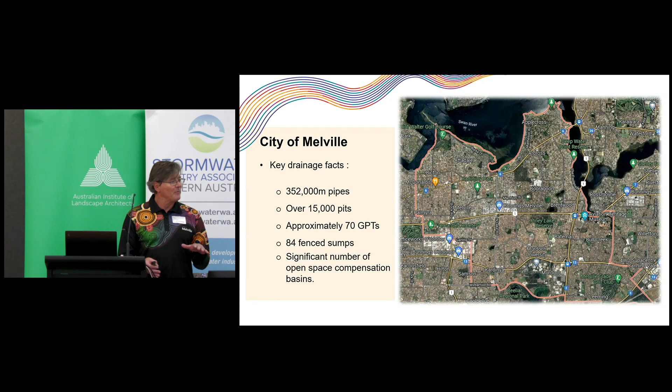Generally speaking, apart from near the wetland areas, we've got pretty sandy soils, so there is that opportunity for infiltration. Looking at where we see our major opportunities, some of that is around our asset renewal and upgrade programs.

We have different asset management plans for parks and irrigation that help us with our planning. For example, in our capital works program, we've got a total budget of around 100 million, and of that about 1.5 million is on capital renewal of our drainage infrastructure, and about 700,000 a year is on upgrade and new capital infrastructure in drainage. Our maintenance program is around $1.3 million a year. So it's not insignificant funding we've provided, and we're keen to reduce the impacts of drainage management that leads to flooding and other impacts.

So I'll cover a few things: I'll talk a bit about the living streams and the swales, a bit around our sump retrofit program, some of our gully infill work, and then look at pit and pipe maintenance, just to give you an idea of the sorts of maintenance activities being undertaken.

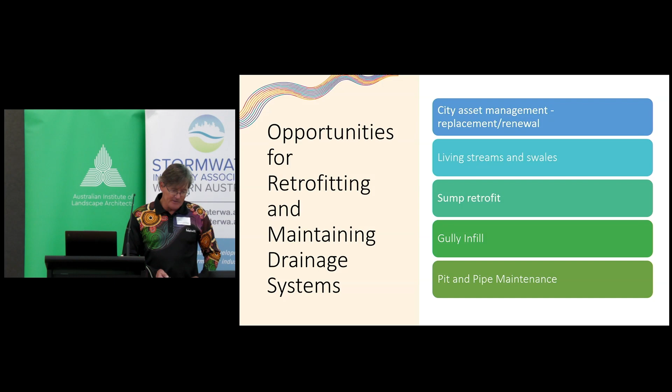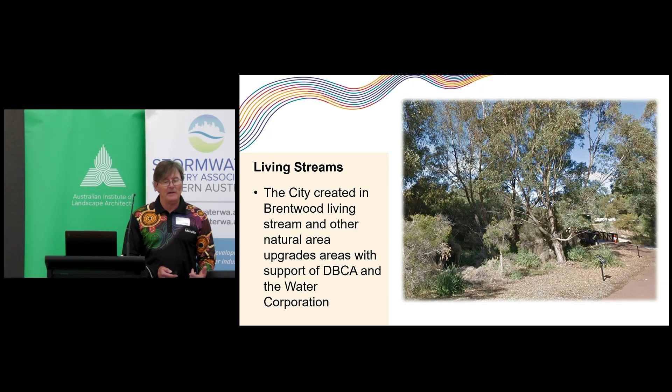So the living streams - I know lots of local governments do this - we had one particular one in Brentwood done in partnership with the local community and NRM groups in the area, and that's been really successful in terms of rewilding an open drain. We use that as a demonstration site to show other people what can be done in translating an open drain channel into a living stream. It's about habitat and wildlife, and we're definitely seeing a lot of increased biodiversity in that area.

The other thing we've been looking at is roadside swales. So instead of putting water into a side entry pit and piping it out to the river, we're letting it flow off into these swales and gradually soak through. There's a whole bunch of benefits: improving water quality going into the river, and also providing an opportunity to plant out in these areas and create shade. We've found we don't need to go to a lot of extent in terms of putting in rushes and sedges to get the water quality improvements - it seems to happen just with a fairly modest type of re-vegetation, though we have done quite significant re-veg in some areas to achieve multiple outcomes.

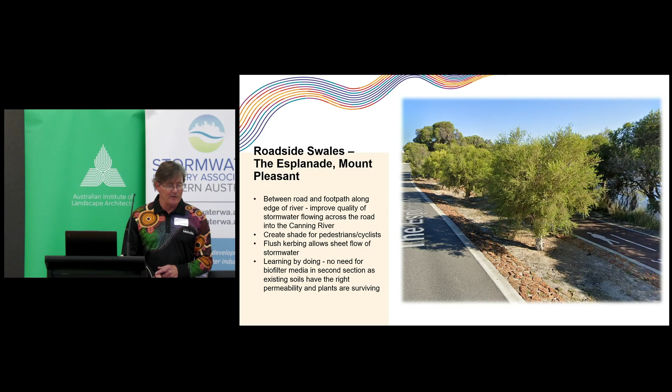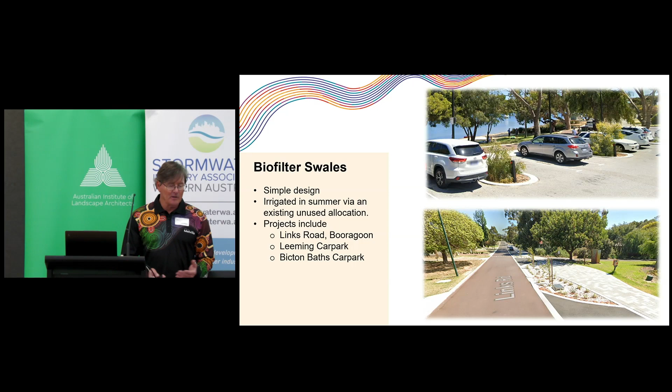This was taken about a year and a half ago, so this is all grown now and the trees are growing. It's really created quite an amazing environment which was in reality quite a harsh streetscape because you've got the large path to connect a couple of schools.

We're also just recently doing some sump retrofits. In this case, we've brought in a 140,000 litre bladder and located it adjacent to the main inflow into the compensation basin, and have taken water off that, which is then pumped into this bag and provides us with some additional storage. We're using that mainly for tree watering and for construction and maintenance watering, so dust suppression.

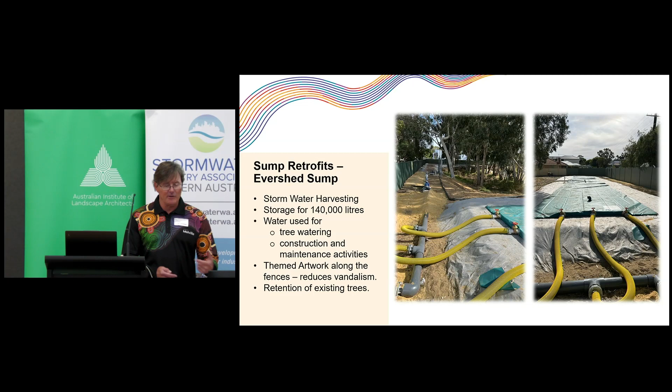Around the actual fence, we took the opportunity to upgrade that and have put in themed artwork around biodiversity, and made sure that through these works we retained all the trees in this area, which are part of a key area of our compensation basins. We've had them revegetated and try to minimise the area we have to get in and clean out and disturb.

This project's pretty exciting. This is our gully infill and renewal program. What we learnt is that we had a couple of really big storm events where we had water lower down the landscape just not being able to cope with the infrastructure there.

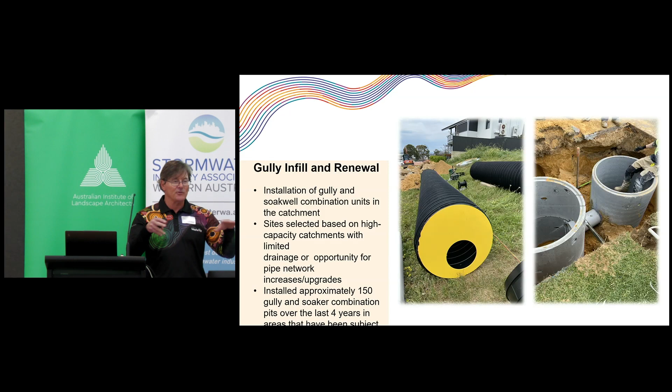So we're having stormwater lids popping up, big concrete lids like this just popping up, and a whole lot of properties flooded, and also other infrastructure damage. So we realised we have to go back up into the landscape, back up into the catchment, and start storing higher up to actually have less water going into the system.

These are designed so that as they fill up, water gets shedded off to the side to store, so that it holds it up, and then it just soaks through the ground while the main pipe still takes most of the load. We've installed about 150 of these to date, and we will keep putting these in because they've shown to be very effective, and actually quite good for maintenance as well. This has really helped reduce our flooding incidents through a couple of events we had in the last couple of years.

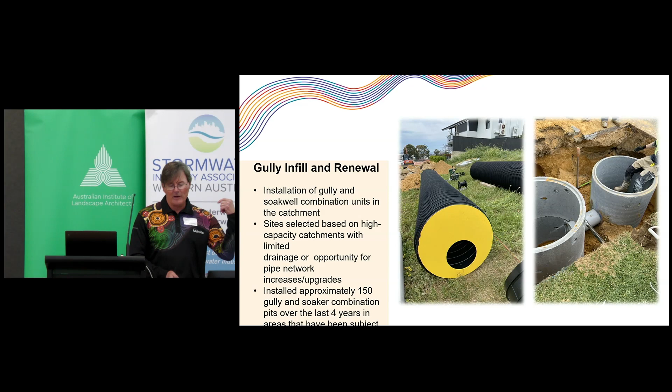Before it stopped raining - our pit and pipe maintenance, this is where we get in and make sure our pipes are operating effectively and our pits are doing what they should in terms of trapping sediments and rubbish and other organic matter. We have a tender that we put out every year for this, or on an ongoing basis. We've vacuumed and cleaned about 5,000 pits, and we've completed up to basically 12,000 metres of CCTV pipe inspections.

Sending these cameras up the pipes to see what's going on, you find big roots in there and you have to get in there and clean them out. We've jetted out about 3,000 metres of pipe, so that's where you clean them up, and then we can go back and monitor to see that they're still clear.

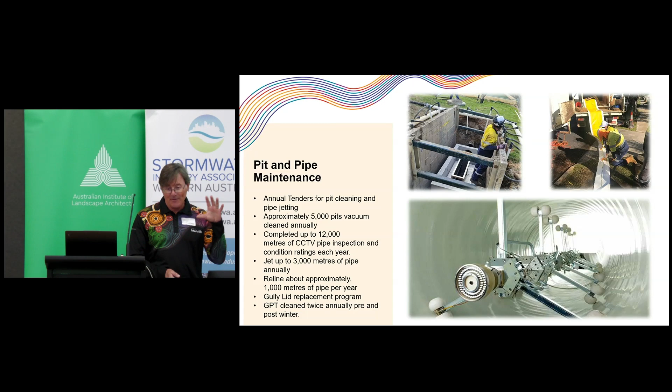We've relined about a kilometre of pipes per year in this, and that's basically sheathing the inside of the pipe with a really hard plastic liner that roots can't get through. I've surprised myself that they held up, but with all the trees around them, they still keep the roots out and operate in a circular fashion, not being pushed in by the roots as well.

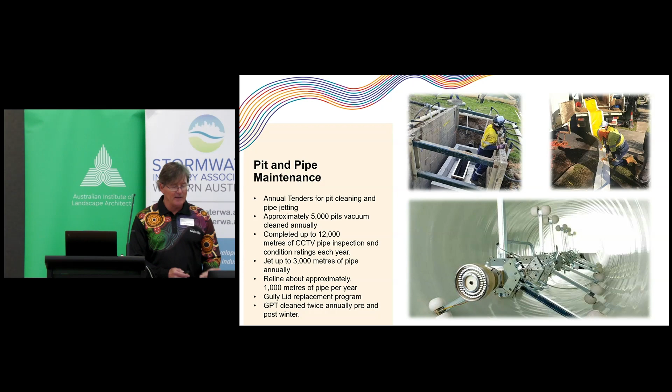We generally try and get our GPTs cleaned out twice a year, so pre-winter and post-winter, and that seems to be able to keep our water quality where we need it to be.

We've also looked at opportunities for greater infiltration at source, on the road surface basically, and we've got a number of projects looking at permeable paving, and that has shown to significantly reduce some of the work that we're doing in these areas. We've used some specialist advice around the use of the paving, and also identified areas where we think we can do it and significantly reduce the pressure on the drainage system.

So we've completed a couple of projects, a road project and a major streetscape and road project.

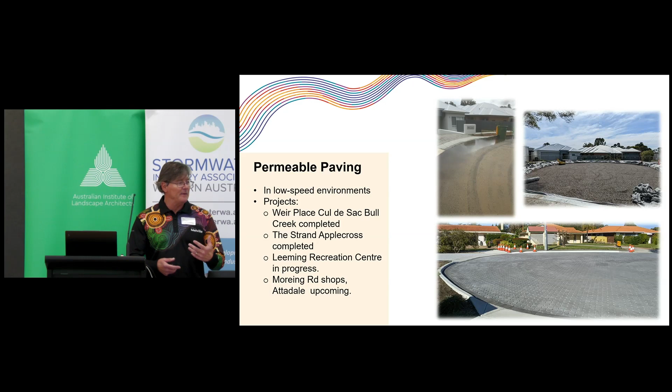We're looking at a rec centre car park, which is quite a large one, at Moreing Road, which is a local activity centre. So this will be permeable paving over an activated area where there's people, cafes and all that sort of stuff. It'll be quite interesting to see how that goes.

The other thing we're doing is really increasing our tree canopy. We've got a significant tree planting program, planting around 3,500 trees a year. A recent study showed that over the last 5 years we've planted about 80 hectares of tree canopy, but in that same period we've lost about 110 hectares on private land. So we're really trying to push that private land issue, and with recent developments it's been a bit of a struggle, but we're still pushing away at that.

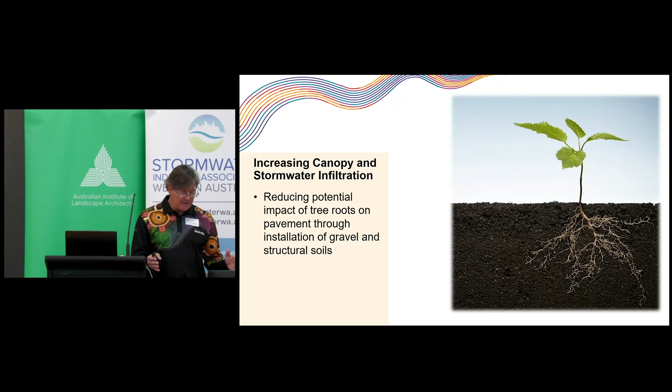We're really looking at how we can keep and plant trees to reduce the impact on infrastructure. Part of that involves using specialist consultants to help us look at areas where we can more or less encapsulate trees in a gravel-type infrastructure or setting, where we can encourage the roots to go down and not out and up. The couple of trials we've done so far have been really, really effective at doing that.

Some of the key success factors, looking at the broader picture, is that this sort of work is now business as usual for us - just part of our normal day-to-day practice. Our teams understand the benefits, and some of them here in the room are obviously here to continue to learn, so that's great. There's close collaboration between teams and our contractors, and we're very clear about our goals, putting them into our specifications for any contracts. This is what we want, so there's no ambiguity around that.

We've got really good process planning right through from selection of places and design, to working with the teams right through to delivery. And our contract management ensures it's delivering what we want, backed up by a monitoring and measurement program to check how things are performing.

So where to next? I think we'll continue to invest in our green infrastructure to try and increase our tree canopy, provide more biodiversity, and really look at making the best use of that to help combat climate change.

We're also looking at further permeable paving installations. We're updating our asset management system to recognise water sensitive urban design as a separate category, so we can have an asset management plan focused on that. And we're also looking at infill gully and other opportunities to get better infiltration up in the catchment, to reduce the impact or the volumes in the main drainage system.

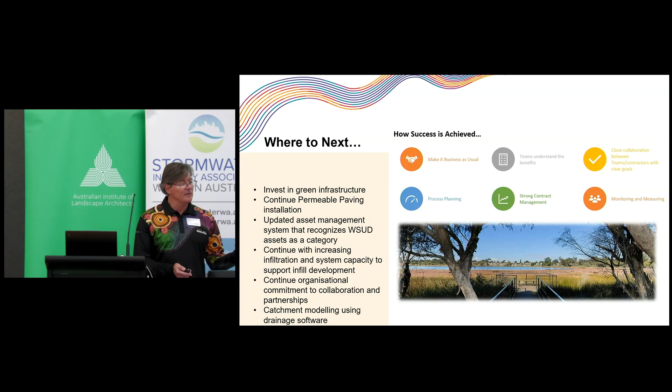We're also doing a stormwater environment management strategy, a very high level document, which identified that out of our 130 or so receptors in the environment - compensation basins, bubble ups or whatever - about 80% of those need additional storage volume. So we're now looking at how we achieve that, either through infill or enlarging the basin if possible, really looking at how we can cater for the 1 in 100 year event, or I think they call it 1 AEP now, 1% AEP, so that it doesn't impact flooding on properties.